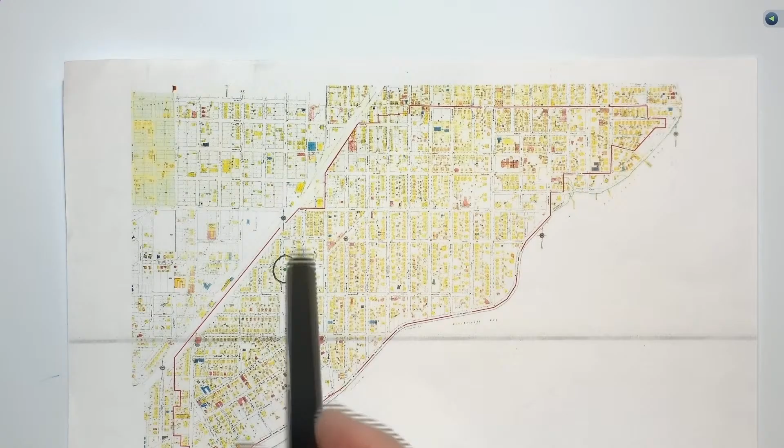At this time, briefly, I'm going to go through the photo presentation. I'd like to start with the Sanborn map. The one that I start with is 1929. Property in question is highlighted. It is a corner parcel on the corner of Fremont and Bristol. There is an alley that runs north and south behind the subject site. When you look at the Sanborn map, it gives us a lot of information: setback, massing in relation to the parcel, and construction type. If you look at what we circled here in the immediate vicinity, you see all the yellow, which indicates frame construction as well. So we use this as a tool on a daily basis.

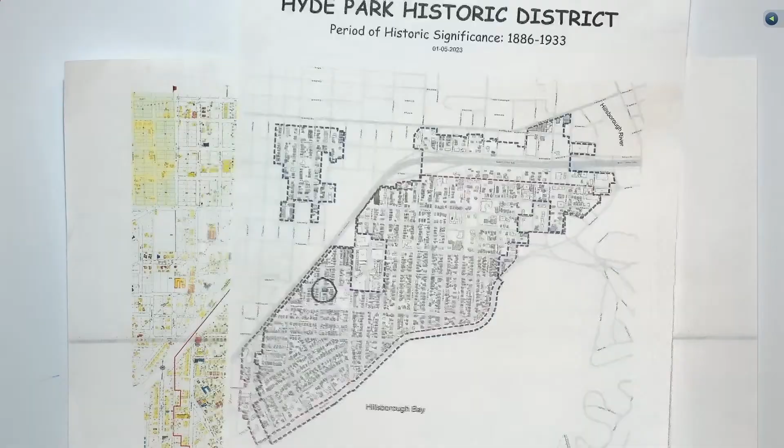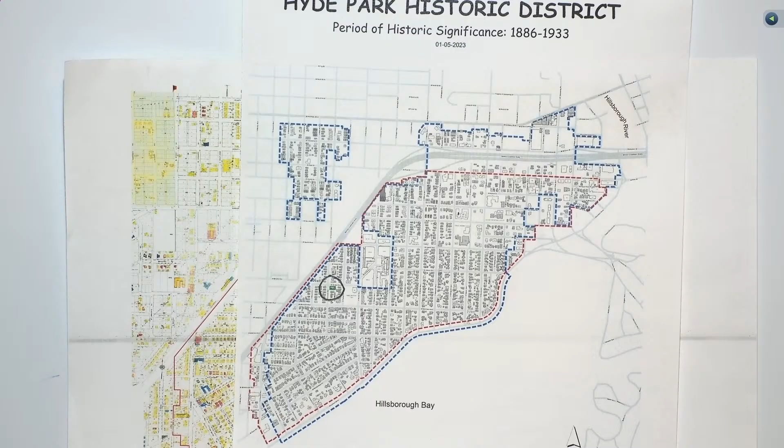This is our vicinity map. That's current. It shows the structure's type, if it's contributing or non-contributing. Property in question is obviously circled here and highlighted in green, and you see the proximity to Hyde Park Village. So it's to the west, southwest of Hyde Park Village. It is indicated as a non-contributing structure on our map because it's not shaded in. And the accessory structure that's there is shaded in, which indicates it as a contributing structure.

Also, as part of our photo essay, I like to show the current aerial as well. It shows the tree canopies and the grid that's associated in the immediate vicinity. If I turn it the right way, you can understand it a little bit better.

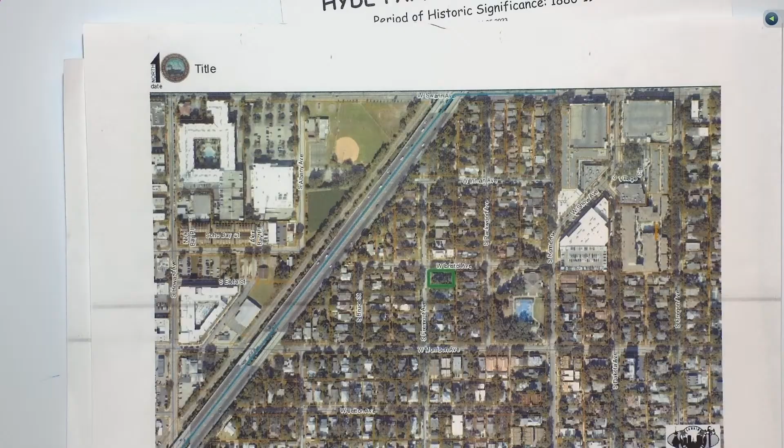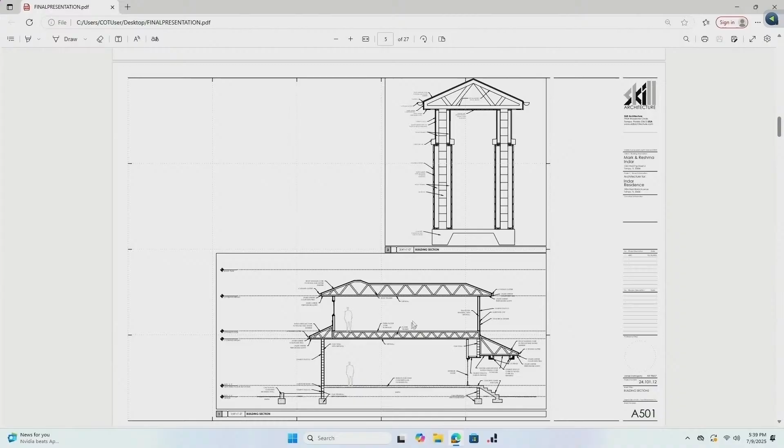Next sheet over are the building sections through several areas of the structure, and I'll detail those out further along. Next sheet over is another building section, and then I also have a section through the covered breezeway as well.

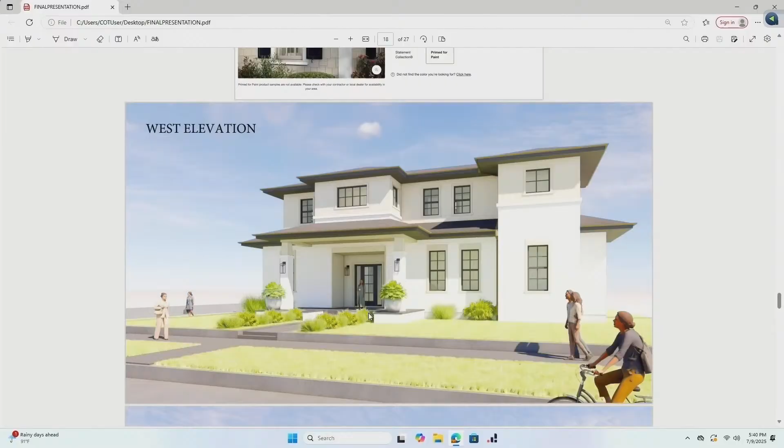And these are the renderings, starting with the west elevation, northwest corner, north elevation, northeast corner again, south elevation showing the breezeway, more close-up shots of the breezeway, southeast corner, and then the rear lanai. Okay, and that concludes that.

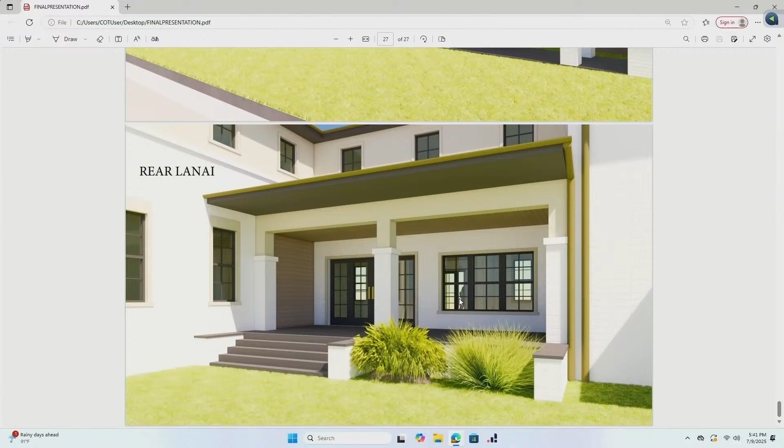So what I'll do is address the comments that were made from the last presentation, starting with comment number 1, dealing with buildability deficiencies that need to be corrected as discussed. Our response is that we refer to updated elevations, building sections, and renderings.

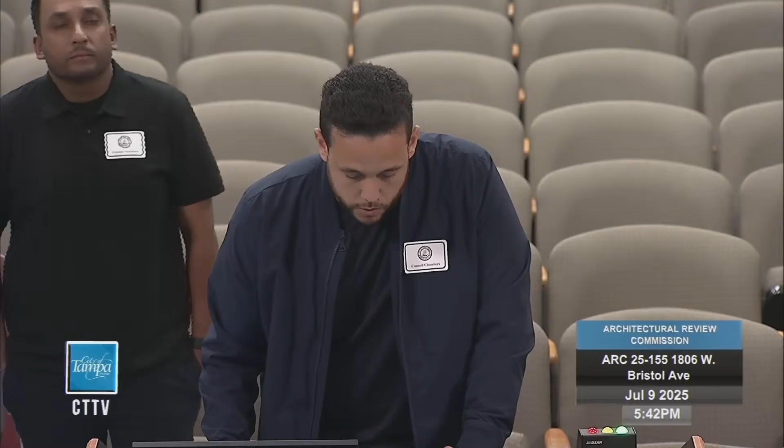Comment number 2: complete wall sections through multiple locations of the building from foundation to roof, including porch details, calling out all materials and details. So what I've done is updated the site plan. I included a cross-section through the main entry porch, another cross-section through the secondary entry, a cross-section through this side of the house as well, which also cuts through what would be the third entryway into the house, and also cuts into the breezeway.

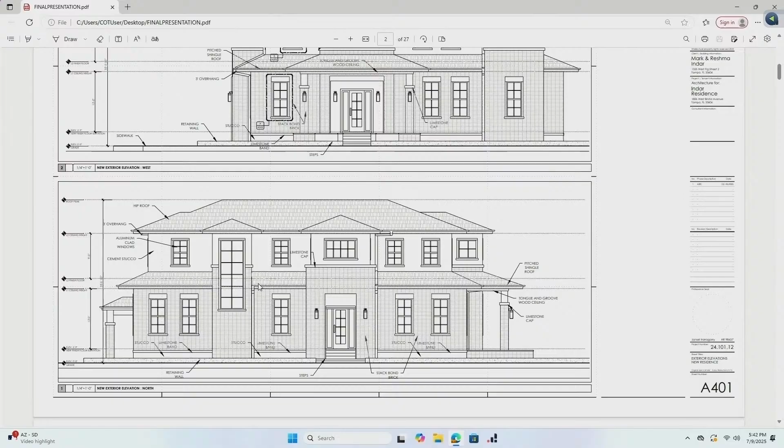Comment number 3: include more window details and clarify window types and locations. What I've done here is updated all the windows, so now it more accurately shows the difference between fixed windows and single hung windows. I've also included enlarged elevations of what would be our two prominent window types, and the detailing surrounding the windows.

The breezeway, comment number 4: breezeway to be further detailed and clarified in its relationship to the existing contributing structure, to be detailed.

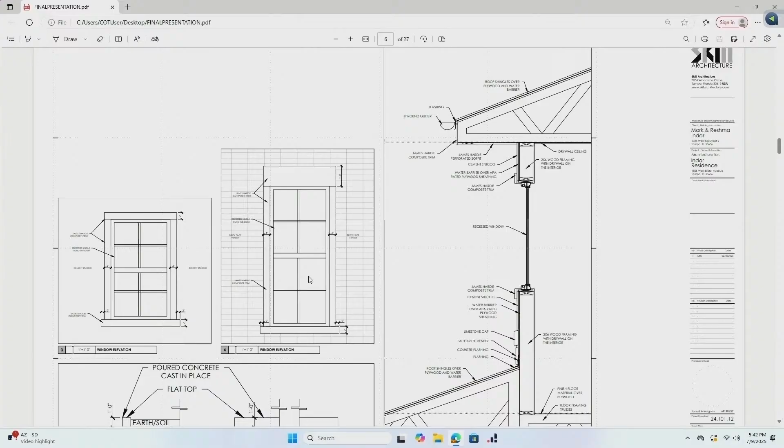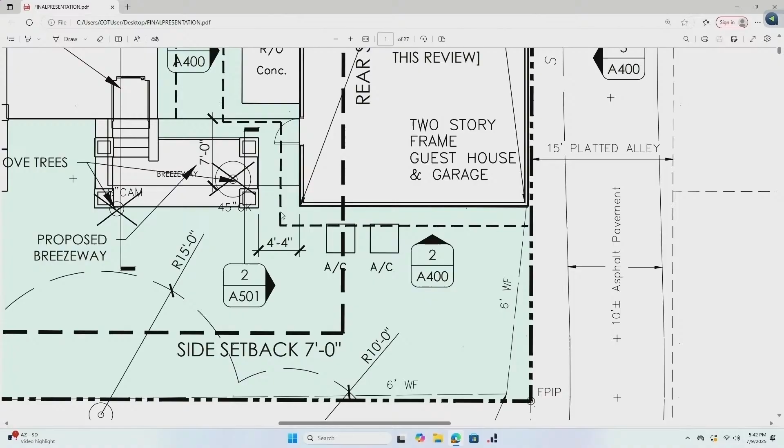Since the last presentation, we've gone ahead and decided to maintain a separation between our proposed breezeway and the detached structure. We're going to have it separated by about 4 foot, 4 inches. That's highlighted in the site plan.

And then in this south elevation as well, that's showing all the dimensions and separation between the exterior wall, the accessory structure, and our proposed breezeway. That's also shown in the rendering at the end.

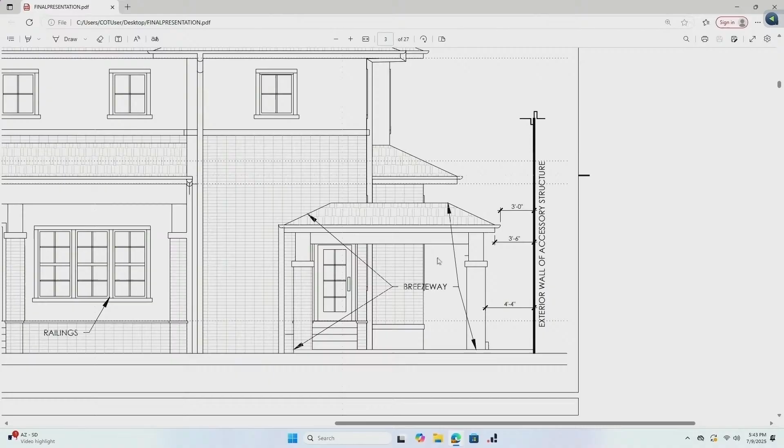Last comment: gutters, downspouts, accessories, fascia, and the relationship between brick and stucco all to be clarified. Starting with the gutters and downspouts, that's now indicated on the exterior elevations and also shown in the renderings. I spoke to Ron, and what would be appropriate for this project would be round gutters and round downspouts.

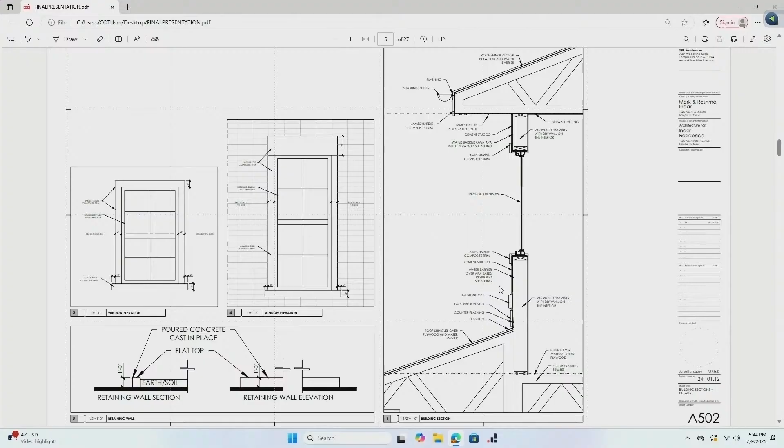As far as the relationship between the brick and the stucco, I further detailed those out in the building sections as well. All 3 building sections, and also in the window details, showing all the necessary flashing and how all the different materials connect and intersect together.

Have anything else? No. And that will be the conclusion of my presentation.

Good evening, Commissioners. Ron Vila, I'm a planner with Historic Preservation. Staff's finding that this application is consistent with the conditions from the final approval. He has them on his drawings. His wall section does include the bullet items on page 4, calling out all the exterior materials. He has all the information here, I believe, addressing the 5 conditions from the prior public hearing.

I'd like for him to just take a minute and go through each of them independently so you could ask questions along the way. He went through them a little rapidly, but the information is here. So if he could go back to the first one and put up the document supporting his position, then you could ask questions and continue on. That concludes my portion, and I'll be here to answer any questions.

Great, thank you. I don't see anybody in the public who's here to comment, so we will bypass that and go to commissioners' questions. I'll start on my right.

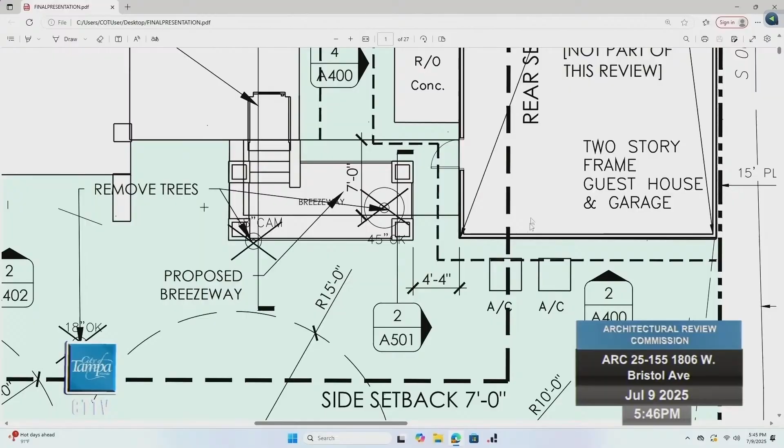Can you put the site plan back up where you now have the separation between the accessory structure and the, can you zoom in there? Okay. That's all I had. Thank you.

Me, okay. Can you put up the detailed wall sections, please? This is mainly my concern, not building sections, wall sections. The standards require 3/4 inch wall sections through primary locations.

Can you zoom way into this? Yeah, these are the two I have as far as the sections are concerned, enlarged. Right, I need you to zoom in. I can't read any of that at this scale, okay?

So we're no longer using brick, we're using brick veneer, correct? Yes. So there's no brick on the project. Yes. And there's a limestone cap. How is that attached, is it directly attached to the wall? How is it attached to the wall? Sheeting. How is it attached? Oh, through mortar. Okay, so it's mortar attached to plywood. Correct. Okay.

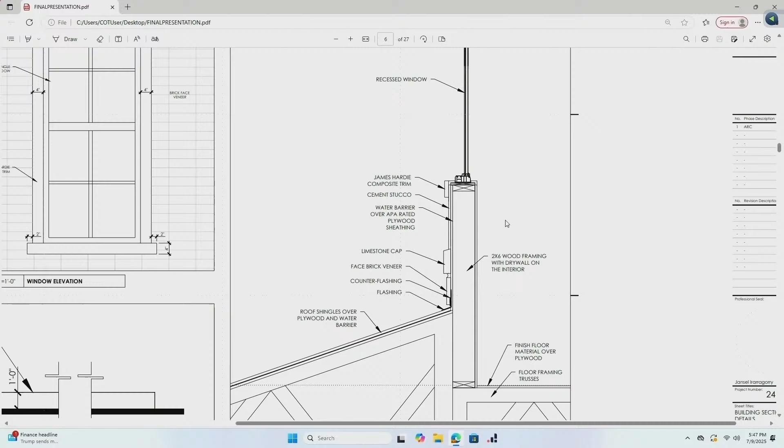How is the cement stucco attached? With the lath. With lath, okay? Mm-hmm. But that's not called out. Can you zoom into the window sill? Zoom in, as far as you can get, okay?

Can this actually be built like this? I believe so, yes. And I'm asking specifically because one of the concerns we've had all along is that we don't think the building, or our comments are that the building can't be built the way it's detailed, and therefore it's going to look different when it's actually built, okay?

This has a flat water collecting sill, the window's below the stucco. There's no drainage plane from the window to the exterior of the building. That kind of thing changes the way the building looks. That James Hardie composite trim is not going to be at that location, there's going to be a slope. Right now you have that Hardie trim attached to stucco, and it's all drop dead flat, which is not how it's going to get built.

One of our concerns has always been that what's being shown and presented to us is not buildable in these details. Therefore, when it does get built, it's going to look different than this. So what we're approving is not what's going to happen in the field. That's been my main concern. I think the majority of our main concerns is that we were not being shown things the way it's going to actually get built in the field. Okay.

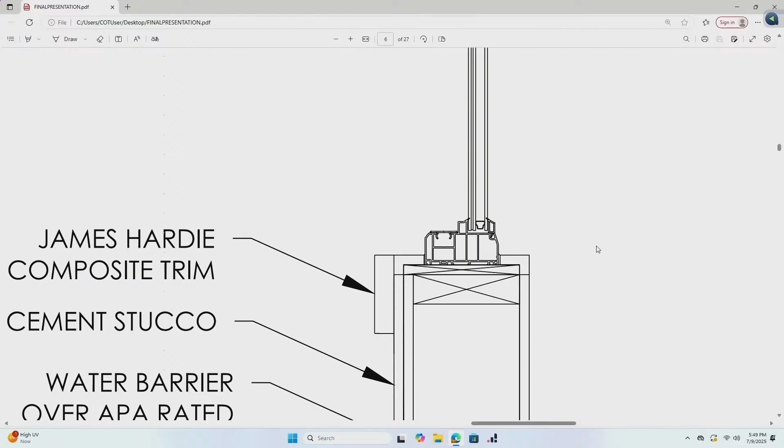So you can zoom out a little bit from that and go to the soffit, the roof soffit heads. The roof soffits there, okay.

What's holding the gutter up? That is just gonna be... I never dove into that level of detail. I typically just show the gutters.

Again, can it be built the way you've drawn it? I've never had a problem in all the years I've been doing this. Understood, but we are approving something for you in Hyde Park. Have you ever designed a building in Hyde Park before and come before our board? Yes, I have.

What we're seeing here is not what is going to get built. That's not how the gutter is going to get built in that location. First of all, it's way too high. It's going to be lower than that. And there's no bracket holding it up, and what's the spacing of the brackets?

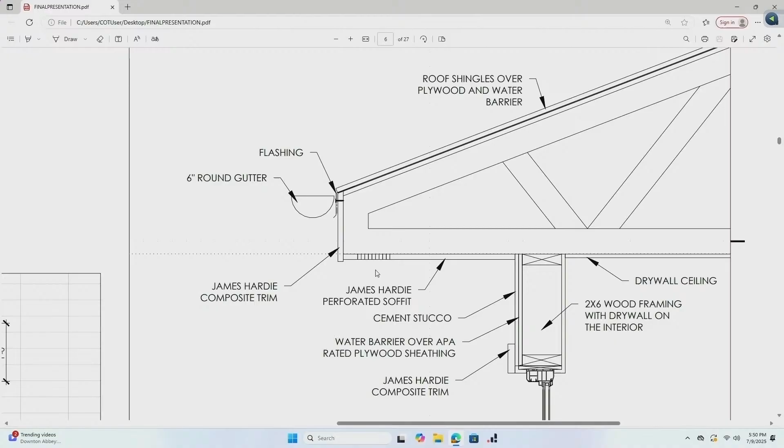Okay, you can zoom out from that and go to the other wall, go down to the bottom. No, on that wall section again, go down to the bottom where the joint between the roof and the brick veneer is.

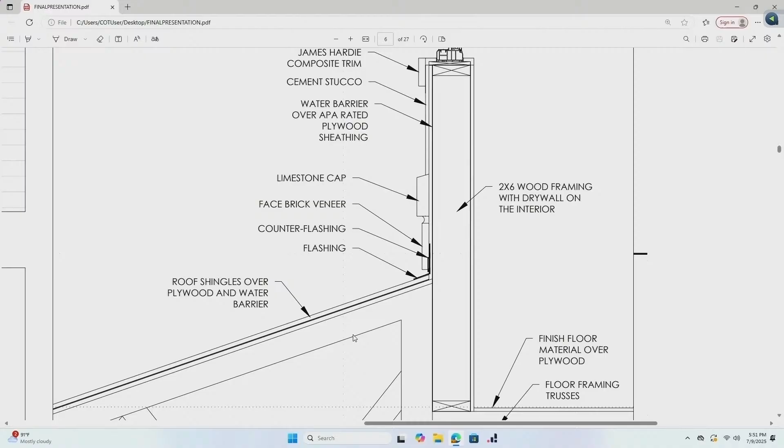How is the stucco joining the limestone cap? Or abutting the limestone cap? If there's a difference in materials, there's going to be a joint there. Yeah, I think I'm just missing the flashing I showed in the other one. So we're gonna introduce a base flashing there between where the stucco meets with the limestone cap.

Where are you showing that? Yeah. Okay.

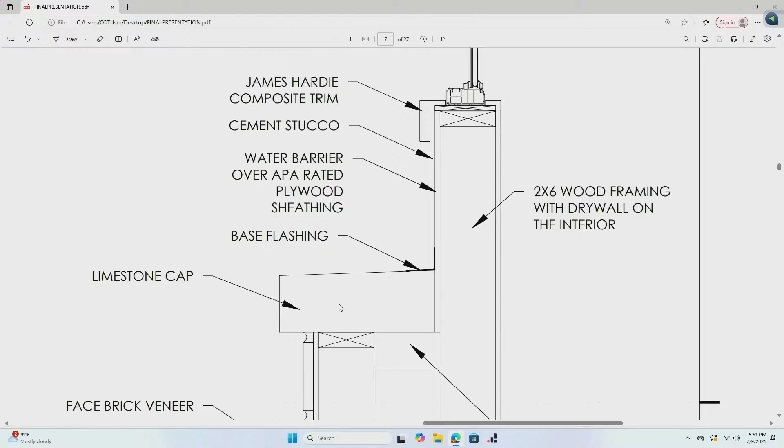Again, we have the same issue with the windows here. That's not how the windows are going to get built or installed. You can pan down, please. So there's no weather barrier behind the limestone?

Yes, I'm gonna have one. It's where it says water barrier over APA rated plywood. Right, but the sheet plywood stops. Plywood stops, and then there's a piece of limestone sitting there floating with no water barrier between it and the wood framing. I'm gonna have all this dried in.

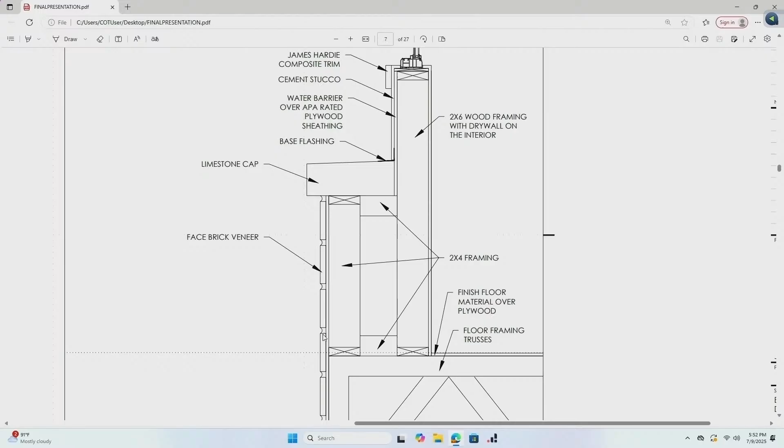Okay, that's not what's drawn. You can zoom out, please. Can you go to the building sections now? And zoom in, okay.

Okay, and again, we're trying to ensure that what you're showing us is actually buildable, so that what we're approving is what's going to be seen when the house is built. And if we have issues with that, we're approving something that's not going to get built like that. And that's one of my main concerns.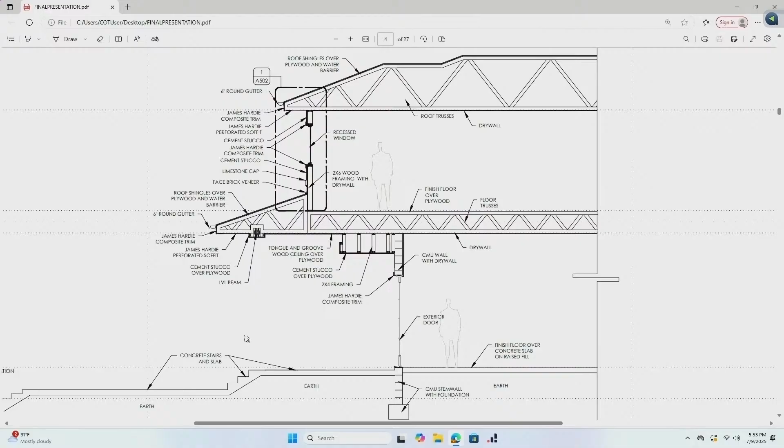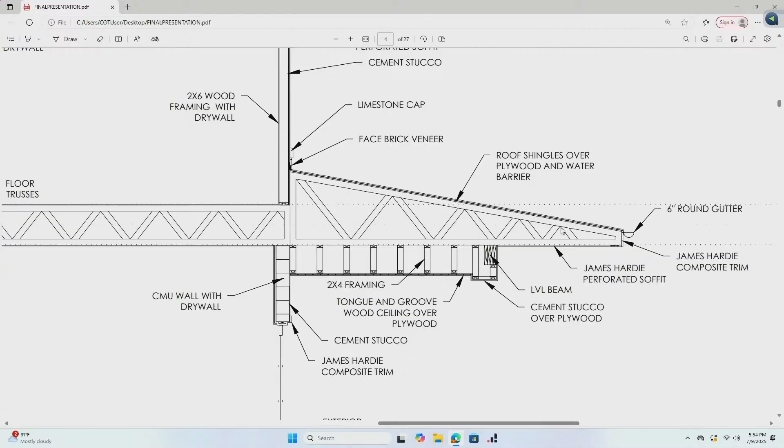Okay, can you go to the next wall section, please, or building section? And can you zoom into the far right top of that angle, I guess where it says face brick veneer, limestone cap, that same detail at the roof. It's just basically one row of brick and a limestone cap at the top of the roof, correct? Right. Okay.

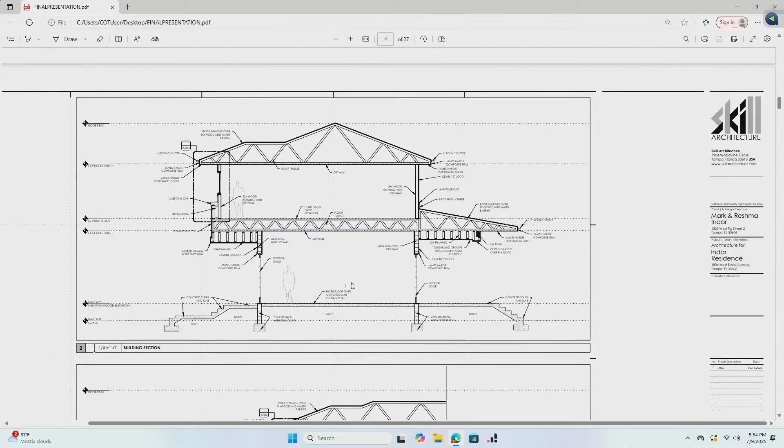All right, I guess I don't have any more questions. I don't have any questions. Let's see.

Go to the breezeway, just zoom into the detailed breezeway, please. Would you like the rendering, site plan, or? No, this one's good, this one here. Stop, please.

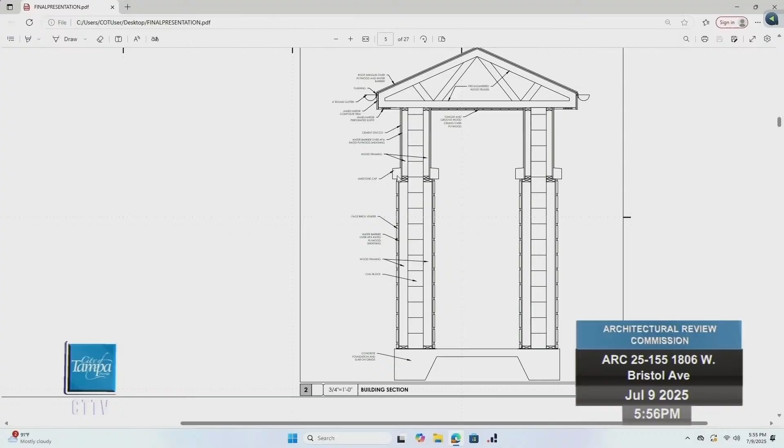Okay, and then now will you go back to the renderings? And just to be clear, you didn't change, well, you tell me if you changed anything architecturally on the building. One of the changes was these caps used to be stucco, cement stucco. Do me a favor and show me on the renderings, because I'm more interested in the aesthetic. You won't see the difference. Oh, okay.

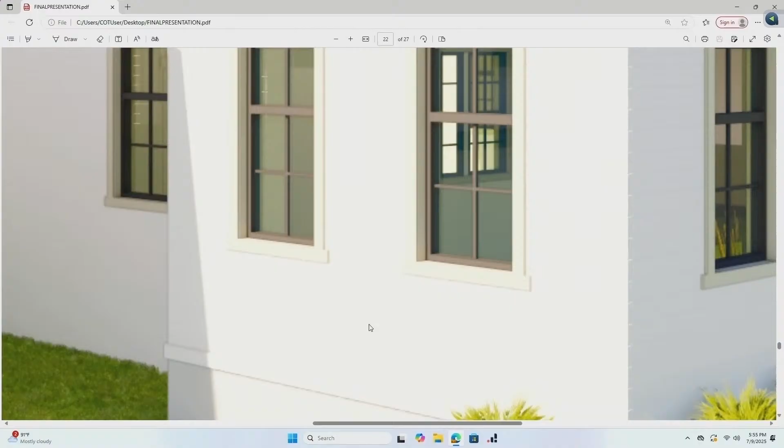In other words, the volume didn't change, it was just the way to build it that changed. Gotcha. So like on that rendering, it's brick, it shows up as white, but that's gonna be... Yeah, it's brick. When you zoom out, it's... see like here, that's a better presentation, but here, I understand, it looks like horizontal siding, but it's not. I got you, I'm not worried about that.

The headers, like on the first floor windows, are those the same size as they were in the last presentation? Yes, nothing's changed on that, other than adding the gutters. Got it.

Yeah, and now let's look at the downspout locations, because I saw that you showed them on the rear. I just want to quickly scroll through and make sure we got them all. Okay, and I can't see anything at this level of zoom, personally.

So here's downspout number one right here, starting at the top. Got it. Then there's a second one here on the left.

That's the second one. This is the third. There's a fourth, got it. That's a closer shot in.

And these are some of the back ones. This one for this roof, the second roof here. This one for the lanai, and then this part of the roof as well on the back. And then lastly, the one for the breezeway itself.

Got it, zoom into that one right there. Okay, so you got the separation, you showed that. That looks good.

I don't really have much of a rebuttal. I think the emphasis should be on the overall exterior look of the building, and I think we're getting caught up into some of the stuff that's not even gonna be visible, such as trusses, basically the interior bones of the house. Additionally, I agree that this is gonna be sloped, but that's gonna be such a marginal slope, no one's gonna notice that from the exterior. That's all I had to add.

I was gonna piggyback off that point, and I understand the concern about what we're displaying, you guys want it built that way, and we feel the same way as well. If we run into something where it's not right, like the gutters have to be changed to a different location, we're gonna say no, this is how we want it. It would be the same if they said you can't have a window there, I'd say no, this is how we want it, and if you have to do it a certain way, let's do it that way. So it's our concern as well. We appreciate the neighborhood, we know what it is, so we know it's gotta be right. That's a major concern for us as well. So that's why we're honing in on the big stuff, and the little stuff, we want to be on point as well.

I just don't know, with the gutters, maybe that'll work itself out when we get to that point, but we will stick to this as much as we can, we will stick to this, so yeah.

Full transparency, I reached out to my former boss, the person I got my license through under his supervision. Face brick veneer is not something I typically do or have a lot of experience with, so I did consult with him as far as the details are concerned, and he offered me some guidance and insight into that. But rest assured, we're gonna build it the right way, and we're gonna get as close to what the exterior renderings look like. That's it, thank you very much.